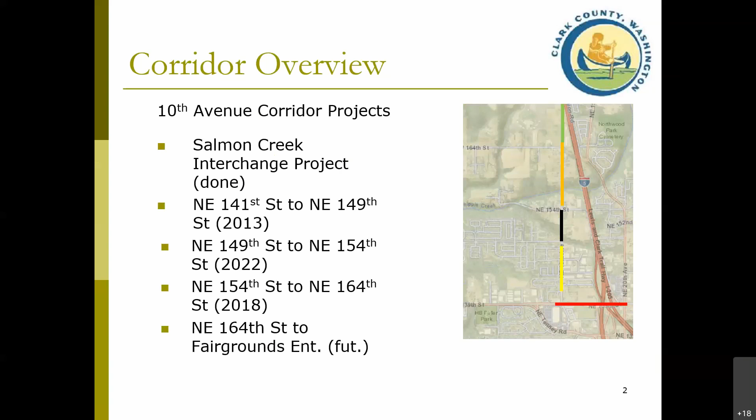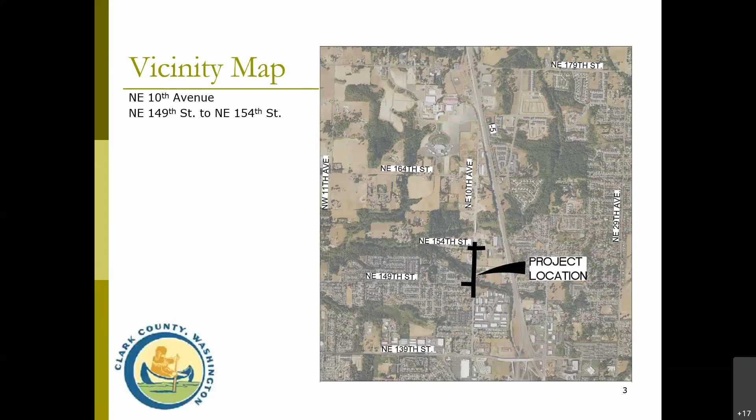So again, this is the location, 149th Street to 154th Street, with a little bit of the legs of each intersection. We'll be reconstructing both intersections, 154th Street and 149th Street, with this project. The work we did for the bridge project was not the full-blown intersection improvement on 154th Street, so we'll be going back to that one and actually raising it. Additionally, we couldn't do it at that time because of where the road was to the south, couldn't match those grades effectively.

So we'll be reconstructing both of these intersections during this project. This is why you can see on the left the new bridge project looking north, and the one on the right is to the south. It's constructed with curb, gutter, sidewalk, and then you see in the middle what we have out there at the moment. That is what we are going to address with this project.

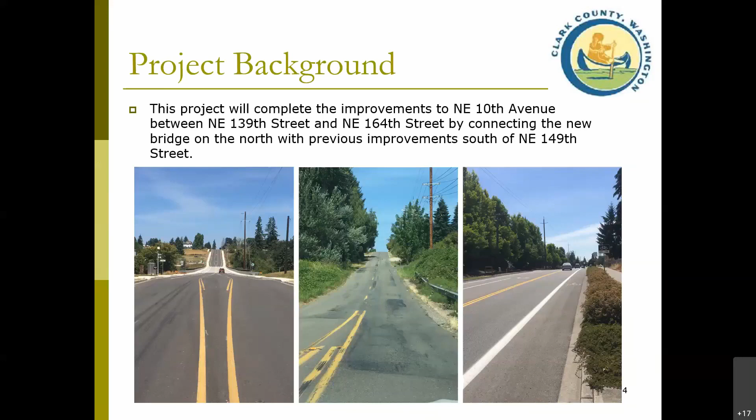The funding for the project: we have a federal grant, traffic impact fees, and the road fund, the three primary sources of funding for the project. I think the federal grant is a $3 million grant. I meant to have a nice pie chart here, but I did not get to that point. I apologize. If you have questions about the funding, you can ask me or email me, and I can provide further information.

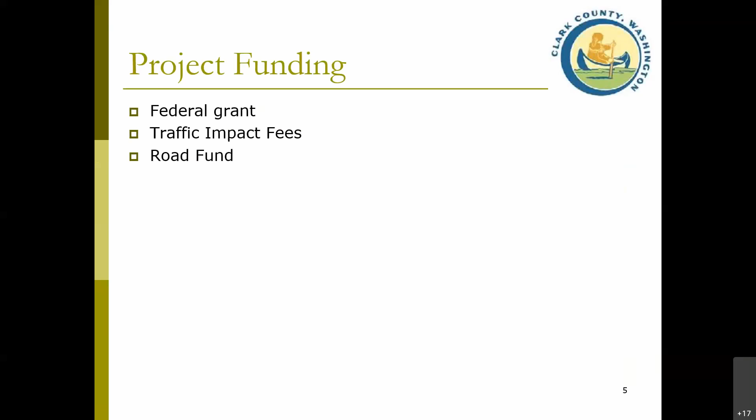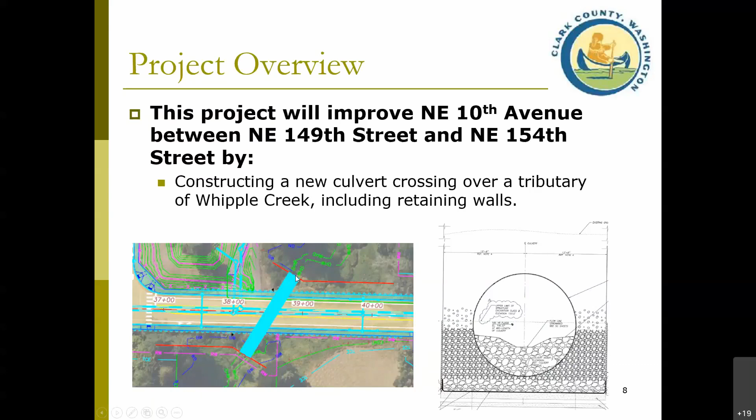We also will be installing a new traffic signal at the intersection of Northeast 10th Avenue and 149th Street, though this doesn't show it. There will also be a stormwater detention pond—we have to treat and detain stormwater with our project—and it'll be located on the corner of 149th Street and Northeast 10th Avenue.

We are also including work from the Clark Regional Wastewater District in the contract. They're adding a sewer force main from about the culvert area up to the north toward 154th Street. We're also partnering with Clark Public Utilities, and there's a large 30-inch main in some places that will be constructed as part of the contract as well.

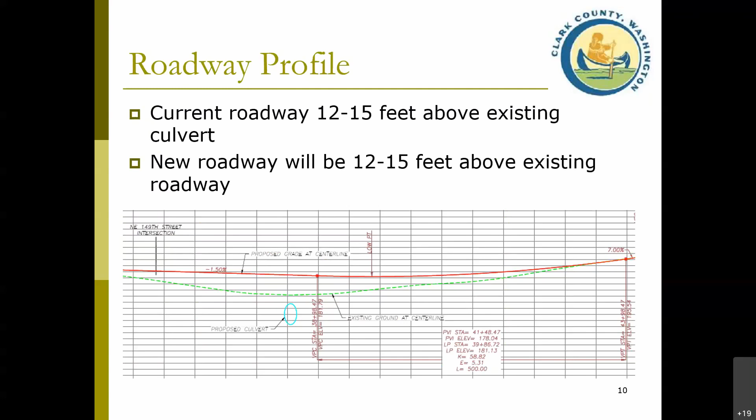But then there's quite a bit of grading and earthwork to be done as we come out. Essentially we're going to tear out the old roadway, dig a huge hole, put the culvert in, and fill it back up. So the road will be closed for that period of time, excavating down to stream level.

Once we're down there, there are some ground improvements that need to be done under the walls and under the culvert to prevent settlement. Those are cement-treated soil, where cement is augured down into the soil, creating a number of piles and columns in the treated area that add strength to the soil where the retaining wall and the culvert will be. And then, as I mentioned, the 17-foot culvert, fish-passable, and the retaining walls.

As you move farther north on 10th Avenue, this will swap over so that as you cross the culvert, this wall will then be on your left side, on the west side, and the slope will be able to match the bank on the other side. Again, just a unique topographical situation where the walls are not opposite of each other.

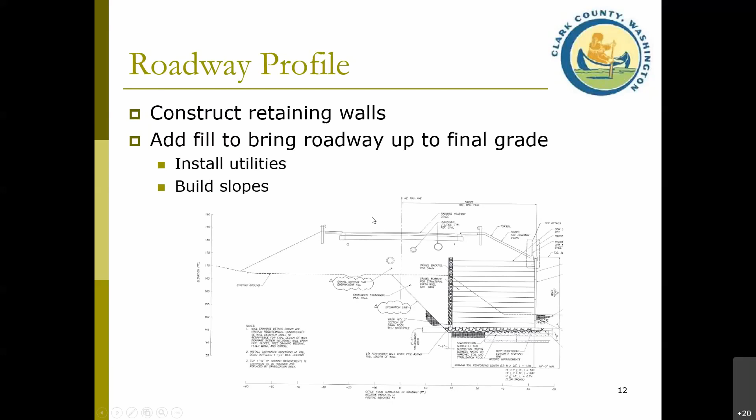Northeast 149th Street will be raised about 8 feet from where it is now. It will stay open to traffic for most of the project. There will be a 30-day period where that intersection is closed to raise it by that amount. They'll raise the roadway up and complete the first lift of the paving—basically tear off the old road, put in everything, and raise the roadway to its first lift, meaning the first layer of paving. Then they'll probably pave the second layer when they can pave the whole thing all at once.

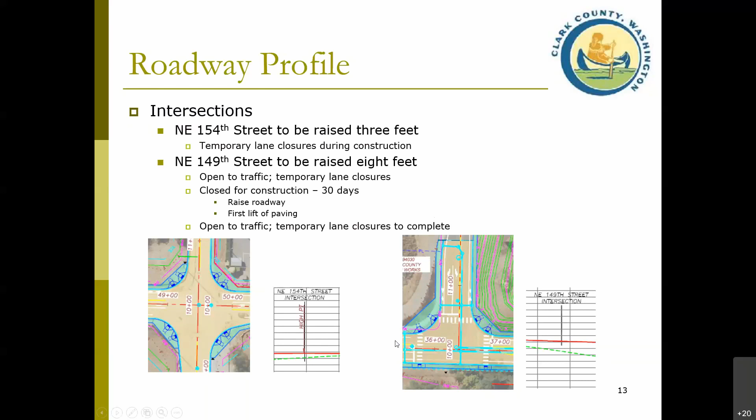So the construction schedule: we opened bids in November. Tapani Incorporated will be the contractor. It was actually today that we had our pre-construction conference with them, and coordination has been ongoing already, but this was a big step in coordinating with utilities and a number of other members of the team—a significant number of stakeholders involved in construction. At this point, the contract construction start date lists as May 3. There may be an opportunity to move that sooner, but that has not been determined yet. So at this point, we're going with May 3rd as our start.

The contractor's schedule shows the main closures anticipated, and again, these are draft—this is the best information we have at this moment. The main closure of Northeast 10th Avenue would begin mid-June of this year and extend through mid-May. I have a typo there—it says 2021 twice. Main closure starts mid-June 2021, and main closure ends mid-May, which should say 2022.

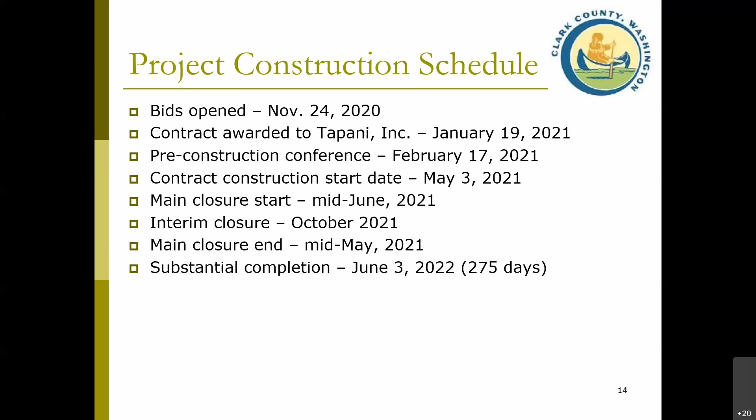So road closures, the main one again, north of 149th Street, closed off about where the red bar is. Between the two red bars, I don't know if I have those in exactly the right place - I may not, because I know there's a driveway close to where that red bar is. But essentially between them, the roadway will be physically impassable for a period of time while digging the hole down to the culvert, down to the creek, replacing that, and building the ground improvements and the retaining walls and bringing that back up.

And then south of 154th Street, where the yellow bar is, I think the closure will be - the contractor will determine that, but I believe he said today that it would function as a three-legged intersection. If there is a driveway or access needed south, local access will be provided, but through traffic will not be able to get through on Northeast 10th Avenue for that 11-month period.

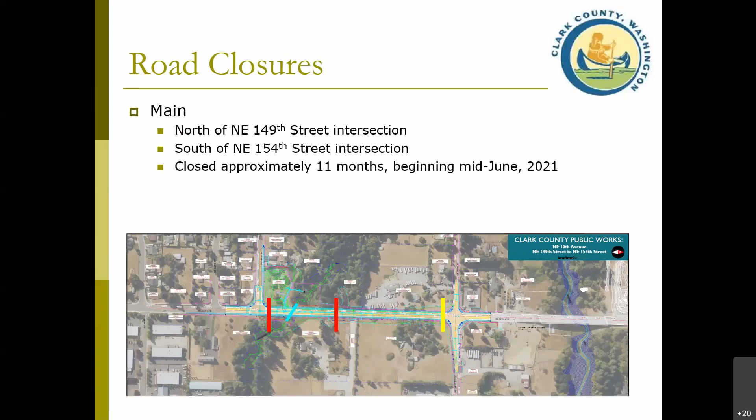The interim closure will close off the intersection of 149th Street for the 30-day period, again looking like the month of October, but then be opened again for traffic.

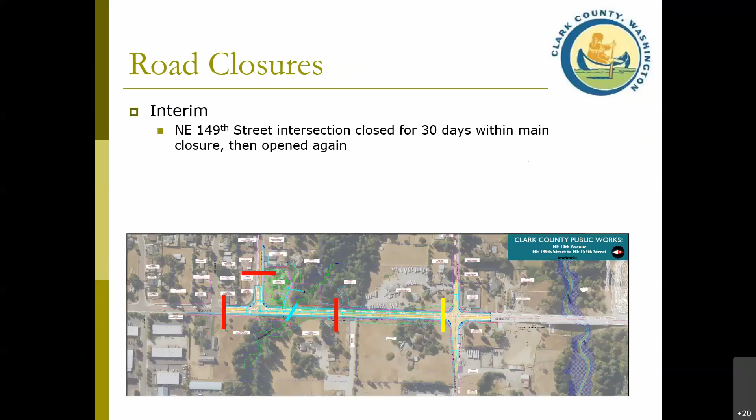So detour routes - this is the main detour route for most of the time for the 11-month period. If somebody has to get through or around Northeast 10th Avenue, there is a route down 149th Street to Northwest 11th Avenue and then back to the east on Northwest 164th Street. So that would be the primary detour route around.

I believe these will be signed as part of the contract where to be moving. And I apologize, it looks like some of the text is upside down. This was originally oriented in a different direction, and I'm going to put north up like it usually is on maps, and I didn't catch until too late that it made some of the text upside down.

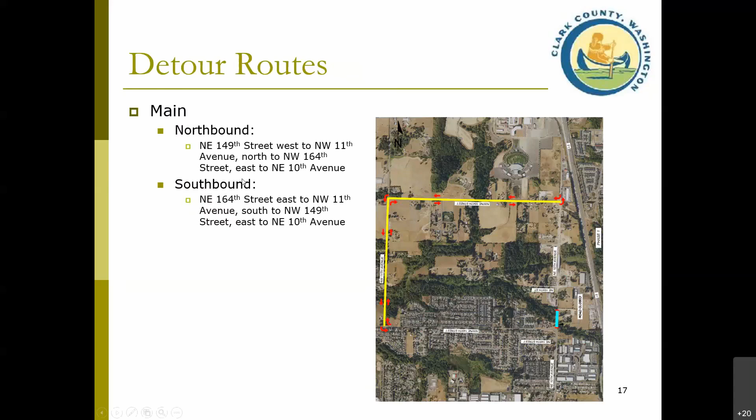So that is the main detour route. The interim route for the 30-day period - there's going to be two parts to it, and this is going to be the part that's close to the project itself. There is a way through there, Northeast 146th Street, over to Northeast 4th Avenue, and then back to 149th Street during the period that is closed.

I'd say that is potentially the worst part of the closure, having traffic go through there. There's a couple of factors that we're going to be watching very closely. When this interim closure gets put in place, the county will be doing speed monitoring, and we'll have existing counts of traffic and how they use that now, so we can see what the increase is. Often what we find is that after the first day or two, it's hard and traffic finds another route. So we'll be monitoring this very closely to see how it's progressing, and seeing if we need to implement any type of mitigation measures to increase safety or to deal with anything that we are able to do at that point.

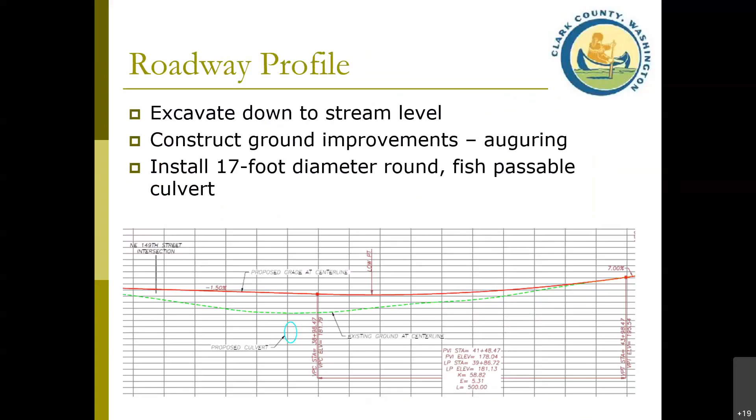I believe that's in reference to 149th. Yeah, so we looked at that some years ago when we were considering it for the bridge project as well, at 154th Street and 164th Street. We had some idea this might be a roundabout corridor. It turns out that on 149th Street, just because of the grades and the way it drops off, it wasn't going to work well for a roundabout—it would have had to be offset farther to the west, and it just wasn't going to work well. So that was why it was discarded.

Next question: will 149th just to the west of 10th also be raised? There's currently a slope down to the intersection coming from the west. Yes, so that will be raised.

Looks like the extent of the work is about 150 feet to the west. That will be raised up to match the existing roads, giving it a much flatter entrance and approach to the intersection. There might be some slope still, but not nearly as much as now. We'll continue the sidewalk on the north side of 149th Street. You can see the blue line extends farther to the west, and I think it goes up and matches into an existing sidewalk on the north side.

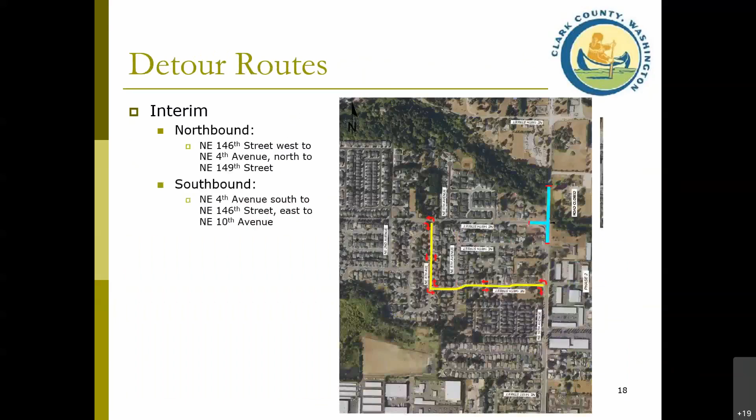I don't know a lot of details on that one, just that they're going to be running at the same time. They're far enough apart that they're not really affecting each other from a construction standpoint, maybe from an access standpoint. I think it's just that they're happening at the same time, and they're going to increase the restrictions, especially on Northeast 10th Avenue during that time. I've just heard preliminary talk, I don't even know what the right word is. I haven't seen anything official about when it's under construction. I just know it's coming, and they're planning on doing it this summer, roughly the same time as the county project.

So for those asking that question, as we get more information about the roundabout project, we will be sure to put it on the project website, and also include those impacts on our weekly construction traffic impacts, so that you have all that information available to you.

The next question is, can they install speed bumps permanently on 149th? Well, we don't really have a speed bump program that I'm aware of at this point. I would have to get traffic involved in that, and I'm not sure that we're installing those right now.

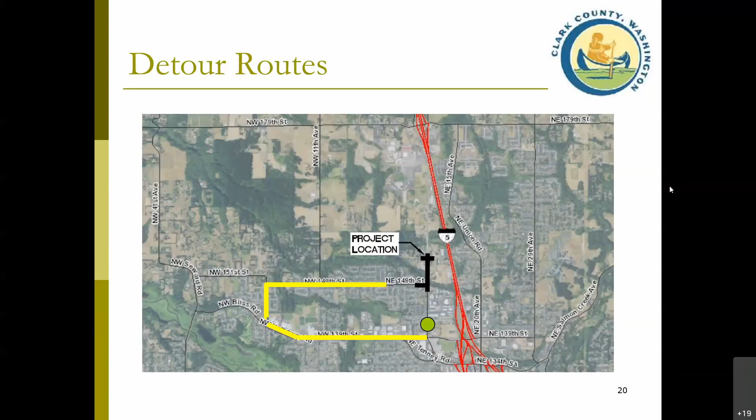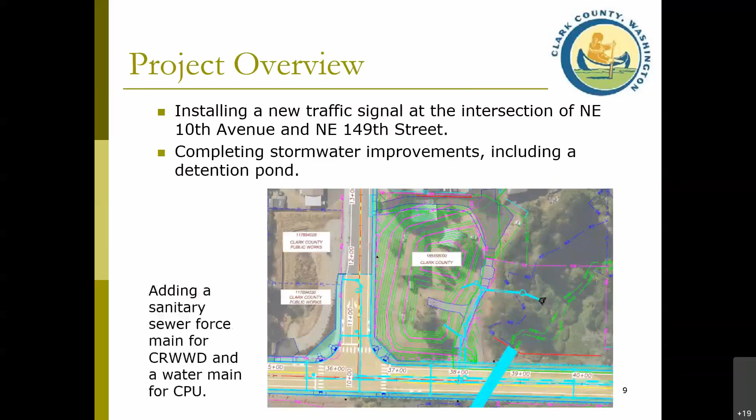I'm going to go back up to that overall view. So we're not adding sidewalk on 148th. You can see the project extends almost to 148th, but we'll be up to where you see the end of the blue lines.

We are adding sidewalk on the west side. Basically, we'll be connecting the sidewalks on the west side, and we'll be matching the sidewalk on the east side, and matching the sidewalk on the west side. Then it will carry around the corner and connect up to existing sidewalk on the south side. And one thing I'm not certain of - I believe on the north side, we do extend the sidewalk up to existing sidewalk along 149th Street. So it looks like it goes another almost 200 feet of just sidewalk on the north side, so that there's continuous sidewalk.

And then obviously we'll match in on the north side of the project, into what we built with the bridge project. That will not extend - sidewalk will not extend east and west on 154th Street beyond basically the curb returns. Those roads are not being developed or constructed out, so it will match back to existing.

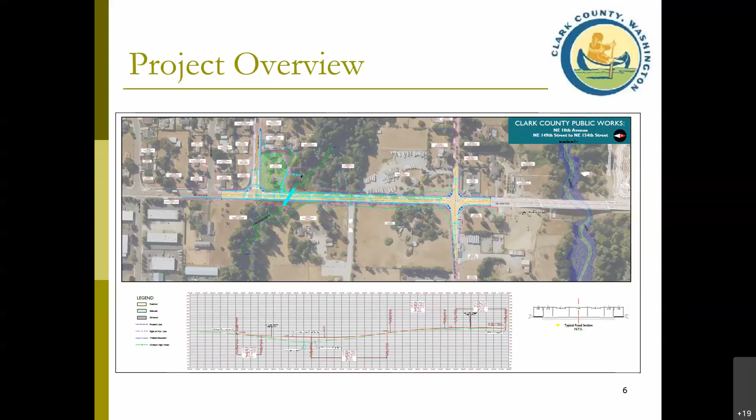Any idea how far apart the two roundabouts on Northeast 10th will be? I'm not sure what the two roundabouts is in reference to. There would be one down on 139th Street, and another one north of 134th Street. There would not be one with the county project farther north of this yellow dot that I'm aware of. I hope that's answering the question, but I'm not aware of one farther north than the one we've talked about with the Skyview project at 139th.

Thank you, Troy. The next series of questions are about signaling and speed bumps, asking about speed bumps in surrounding communities, needing more lights on 149th and whether that can be looked at, and a question about 10th Avenue traffic having priority versus the traffic coming from 149th.

I'm going to jump in before Troy says anything on this and say those are not necessarily part of the 10th Avenue project. That's a great question for our transportation division. Our transportation division manager literally eats, sleeps, and breathes traffic signals and signal timing, and he would probably be the best person to answer those questions. I'm going to post my contact information in the chat. If you send me an email, I can make sure those very specific questions get answered, unless Troy has anything else to add. No, I think that's correct, because it's not dealing directly with the project. I was just going to say, there's a way to capture that question after the meeting off this chat? We can follow up, or they can contact you. That is good, I will be sure to.